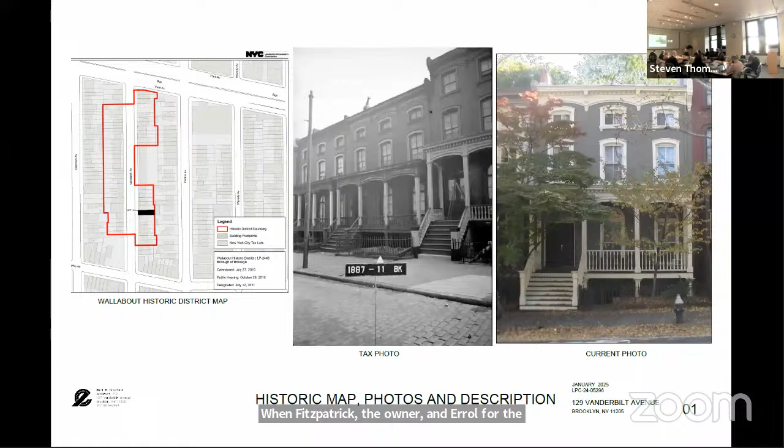So turn it over to Richard. Good morning, Commissioners. Richard Lowry, Preservation staff. I'll quickly go through the presentation with the additional details that the Commission requested at the last public hearing. Wynn Fitzpatrick, the owner, and Errol Crawford, the architect, are here should there be any questions. So again, we have a residential row house in the Wallabout Historic District.

Okay, and this is the existing rear elevation, shown to note that really only the upper floor is visible from the public thoroughfare. And here's the proposed rear addition. Just to show the current line - that's where the existing building is, this dashed line - and the extrusion on one side out to align with the neighbor here. And this is the alignment of the existing neighbor on this side, and it's just a little bump out of the wing wall and the rear addition.

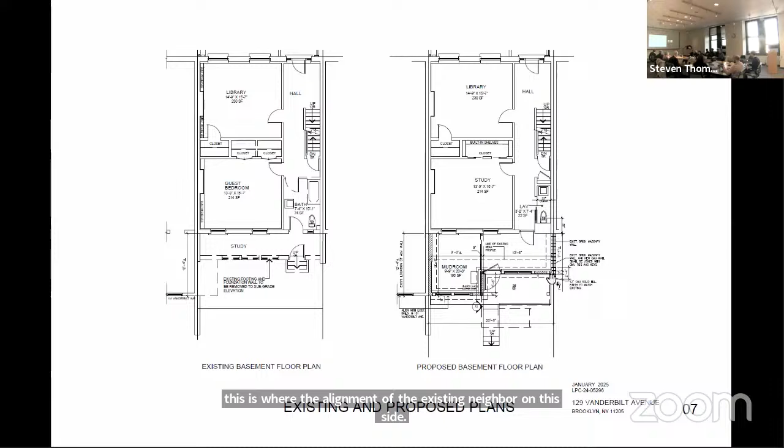And just to show the existing photos again of the rear line of the additions, and you can see the neighbor to the left here. One of the things the commission requested was a rendering just showing the proposal in relation to the adjacent buildings. And again, just a detailed section that we saw last time. But that's basically it. If there are any questions?

I have a question. Were these buildings - or maybe we don't know really. If we need to open the proceedings if we're going to ask to speak. I have a motion, Commissioner Master, to open the proceedings. A second, Commissioner Goldblum. All right, now you can go up and speak. Yeah, thanks.

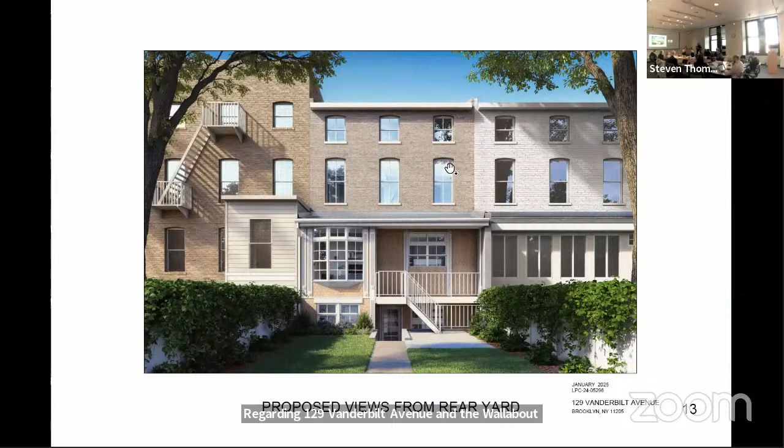Great, okay, appropriate. Then I think we can ask Commissioner Goldblum to read the motion. Regarding 129 Vanderbilt Avenue in the Wallabout Historic District, the application is to enlarge the rear yard addition. I note that this building's scale, style, materials, and details are among the features that contribute to the special architectural and historic character of the Wallabout Historic District.

Recommend approval, finding that the work will not eliminate or damage any significant architectural features. The proposed work will not be visible from a public thoroughfare. The extended rear yard addition and party wall will align with an adjacent rear addition and will be a modest increase beyond the others in the row, and the design of the rear addition, featuring wood shake siding and punched openings with multi-light windows and doors, will feature a level of articulation, materials palette, and ratio of solid to void that is consistent with other rear yard additions to row houses within the historic district, and that the proposed work will not detract from the special architectural or historic character of the building or the historic district.

Commissioner Jefferson, would you offer a second? Go second. Mark, would you call roll? Vice Chair Bland, Aye. Commissioner Chapin, Aye. Commissioner Ginsburg, Aye. Commissioner Goldblum, Aye. Commissioner Jefferson, Aye. Commissioner Master, Aye. With 6 in favor and none opposed, the motion passes.

Right, we'll move to the next item. That's public meeting item number 2, LPC 25-03381, an application for a certificate of appropriateness in the Borough of Manhattan, block 1383, lot 51, 823 Madison Avenue in the Upper East Side Historic District. This is an apartment building originally built as two houses in 1880 and altered in the neo-federal style by S. Edson Gage in 1926. The application is to alter the facade, replace storefront infill, and install awnings and signage. This was last presented at the public hearing November 26, 2024. No action was taken at that time. The applicants will present revisions to their proposal in response to your comments after we open the proceedings.

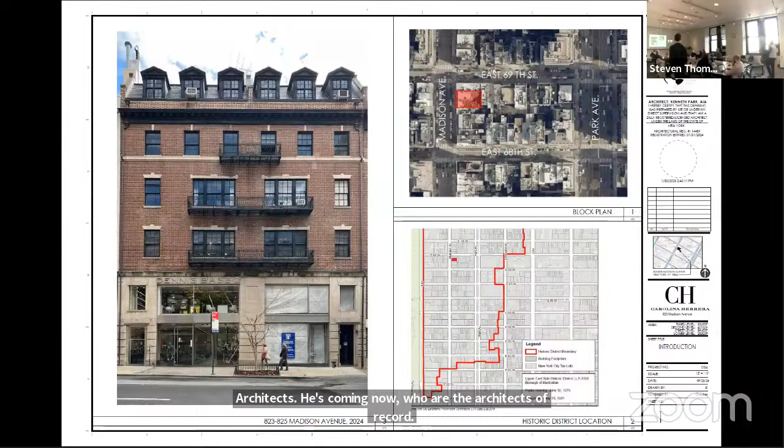As Corey mentioned, you last saw this proposal on November 26th, right before Thanksgiving break. This is a proposal for the new flagship store for CH Carolina Herrera, and they'll be occupying the three lower floors of the building, while the upper floors remain residential. As you might recall, the proposal was for the replacement of the entire base of the building. This is all non-historic fabric as a result of three or four generations of change since the 1980s. So the proposal includes replacement of the base, new storefront infill, and signage.

We can go to the previous proposal here. We have the existing condition on the top and the previous proposal on the bottom.

Just as a refresher, these buildings started their lives as a pair of row houses in 1880, designed by Lamb and Wheeler. Then in 1926, they were completely refaced in the neo-federal style by S. Edson Gage. In the existing condition, some commissioners observed at the original hearing that there's a subtle asymmetry to the design of the overall building. The building to the north was originally 4 feet wider than the building to the south. So while it has a symmetrical composition, the details are fudged a bit to create the apparent symmetry, but there are dimensional differences.

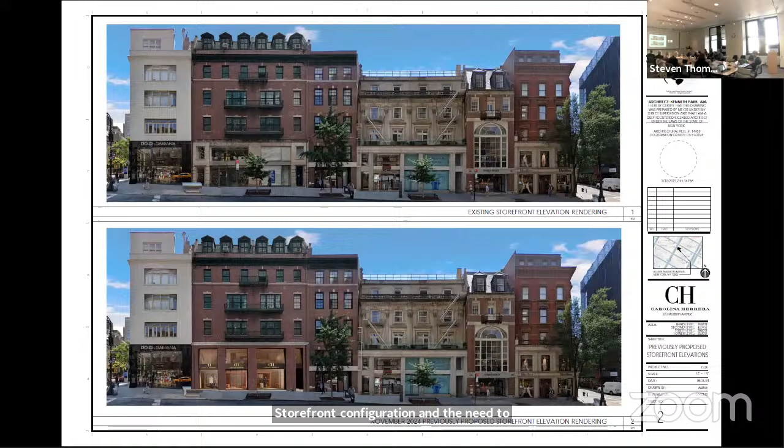At the hearing, the comments from the commissioners focused on 2 primary issues: the storefront configuration and the need for a more symmetrical composition that related better to the upper facade of the building, and the design and effect of the architectural fins at the 2nd story of the storefront. We'll look at this in detail, but for commissioners who weren't at that hearing, this is a system of metal fins that recalls the historic awnings and treatment of shading devices on the upper floor of the storefront.

You can see in the original proposal, we had 4 bays with no defined center line. Each of the piers was of a different dimension with a sort of gradient effect, and each of the bays had varying dimensions.

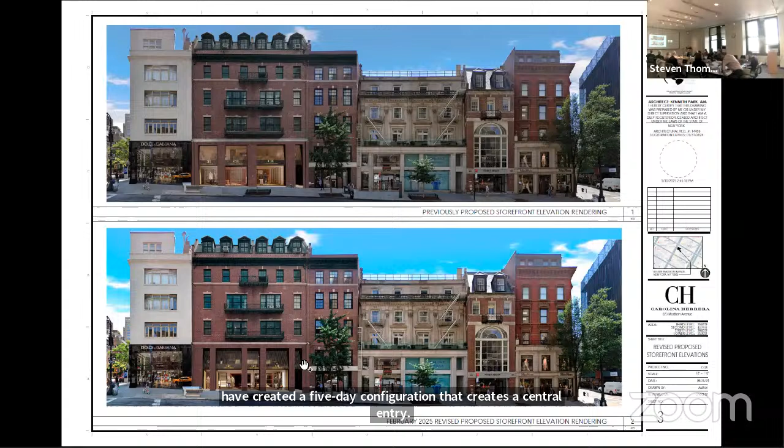Here on top is the proposal, and the current proposal is on the bottom. We've created a 5-bay configuration that creates a central entry, 2 flanking bays, and then 2 bays at the outside, one of which remains the residential entry to the upper floors. This design is based on the historic condition of the building. There was some question about brick versus limestone. The base of the building was historically brick, typical of the neo-federal style, and that kind of underscored the lack of symmetry in the original proposal, and maybe called for a stronger assertion of that symmetry.

Looking at that original condition, it was again a central entry that led to the 2 storefronts. There were display windows at either side, with the one to the north slightly larger to compensate for that dimensional difference between the 2 original 1880 buildings, and then outside narrow bays for the upper residential floors above. The piers were brick all the way down to the sidewalk, and there was a base or stone sill below the storefronts at that time.

Looking back to the context for this proposal, there's a series of approvals by the commission for brick bases on buildings along Madison Avenue, just 3 examples. I think you can see the similarities between our proposal and the previous proposals, carrying on that same sort of proportion and scale of the openings and the relationship with the upper facades. Now with the new symmetrical composition, it's very consistent with these previous approvals.

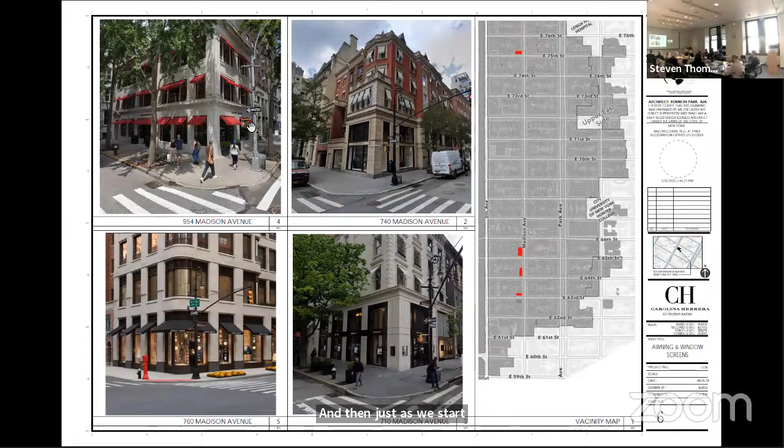As we start to talk about the architectural fins, we looked at other examples of awnings along Madison, how they create a distinct vocabulary. Historically, they were used for weather protection, and some places sold goods under the awnings. But now they are primarily a sun control device and for branding and identity. So we see that layered approach to the facades, the projecting awnings, on the ground floors and the upper floors.

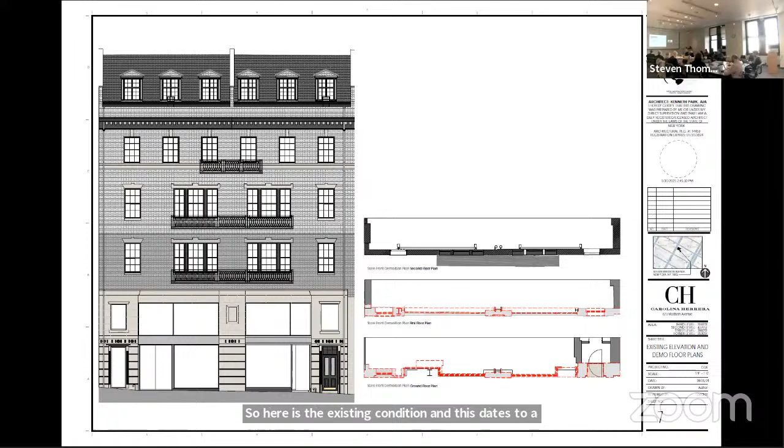Here is the existing condition, which dates to a 2013 approval designed by Paige Cowley, and the current proposal. We have that central entry, a slightly larger north bay. The piers are all very close in dimension, off by inches, just to mediate between the two existing structures. It's not just trying to create the symmetry of the building, but also adjusting for what are the bones of an 1880s building. The southernmost bay remains the entry for the residential floors, and the outside flanking bay on the north end has a very similar treatment to match the southernmost bay.

The upper floor, the second floor - this is a true two-story storefront. There is an occupied second floor within the retail space, and the spandrel is expressed dividing the two floors, and then the architectural fins extend back along the second story.

Here is a detail, the existing on top and the new proposal on the bottom. Again, looking at that storefront configuration: large glazed opening with the spandrel extending across, and then the architectural fins canting back from the face of the brick.

At the time of the hearing, commissioners were questioning the approach of the architectural fins and asked us to study the dimensions, the materiality, the depth, the width, the spacing of them. We did so, and as part of that process realized that the spacing was really important in order for the fins, the entire system, to maintain its gravitas.

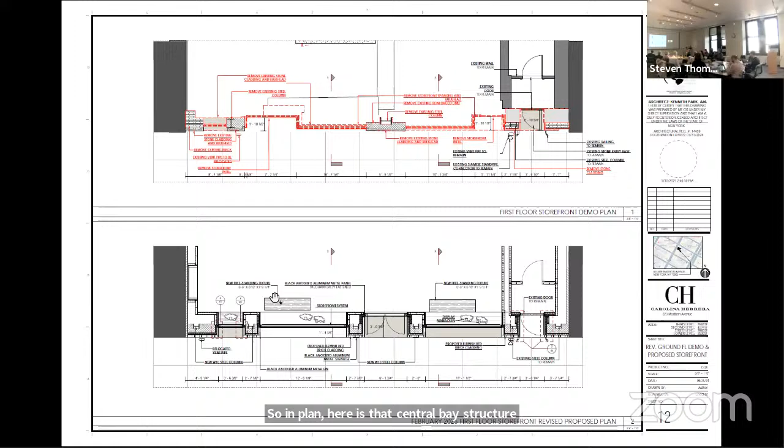So in plan, here is that central bay, putting the structure into the entry, and here was the previous proposal for a symmetrical bay, and the current proposal: a central entry and then the flanking bays.

We've also addressed the graphics a bit. There was a full-scale mock-up built of the architectural fins, and we'll take a look at it.

We tried to model as closely as possible in the renderings the effect and the intent of the fins themselves, and the effect as you're walking along the street, because it is meant to be a dynamic installation.

I was trying to think of what it reminded me of, and I kept thinking of a film reel, in the old films when you see the negative lines moving. But really, I think it's more of a zoetrope, where you're seeing something moving behind a series of openings or apertures.

So as we look at the details of the fins, there's going to be a series of mock-up installations, married with a series of renderings, to better understand how this will appear in the streetscape and what the effect will be on the overall building and the rhythm of an avenue.

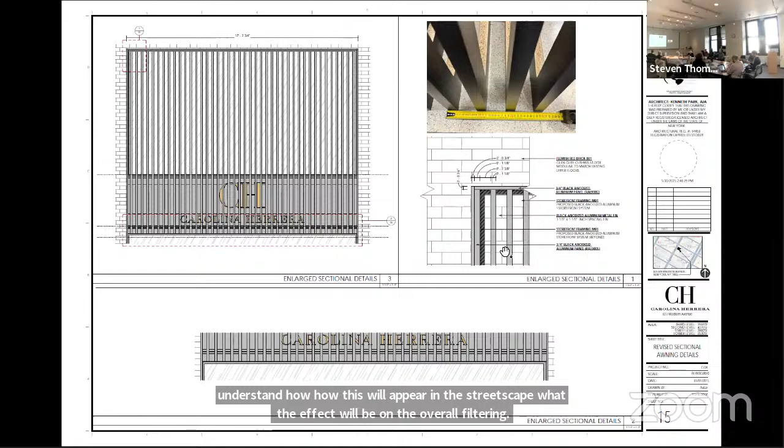So here are the proposed details: 1 and 1/8 inch fins with a 2 and 3/8 inch space between them, and they are 2 and 3/4 inches thick.

That's actually not as deep as it was originally proposed. They've been narrowed up a little, so it actually helps in the reading as you start to get onto the street. And then on top is a sample of the mock-up that was built.

Two gentlemen holding up the mock-up over your head in a nighttime installation, with interior light shining on it.

So we're looking from the south, and here the view is closed. Unfortunately, I don't think you can see this, but what you do get in this view is a reflection on the side of the fins. Very pronounced, and it creates a contrast between the front and the back.

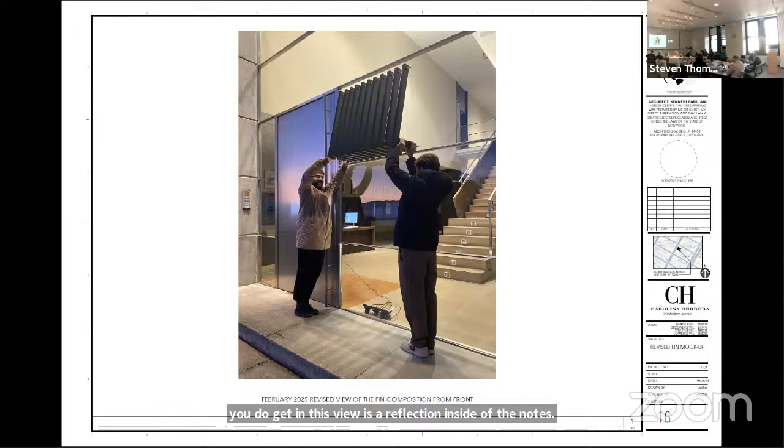So you start to get gradations in color as you're approaching from the south, now seeing the fins. This is the first view.

Moving as you move north, the view starts to open up, and you're seeing the openings between the fins on axis, where it opens up the most. Clear views through, and then as you're starting to pass by to the north and farther north.

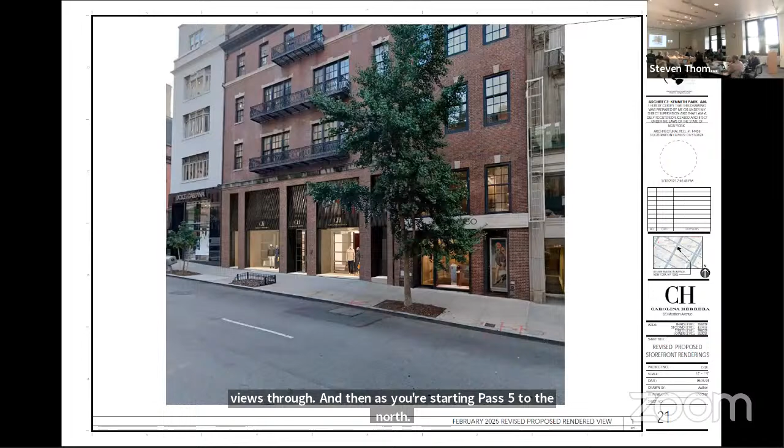And so there's a series of renderings that represent these views from the north. I would point out here that the view is closed, more closed on the second floor, in this view obliquely, but it's not dissimilar from how you experience a normal storefront because of the reflection when you have an oblique view.

You can never see directly into storefronts unless you are in that mirror location, either directly in front of the storefront or just off to the north or south. So you can see in the windows to the south, getting the reflection off of the storefronts. It's not creating a less transparent condition necessarily than what you see with a normalized view.

Detail view from the north, the light coming through. And then this is the view on the same side of the street, looking south, here's the storefront.

So all of this is contained within the system of the storefront. There's this deep reveal, the fins extend back, and the glass of the second story follows that plane of the fins themselves.

And with that, I'm happy to answer any questions.

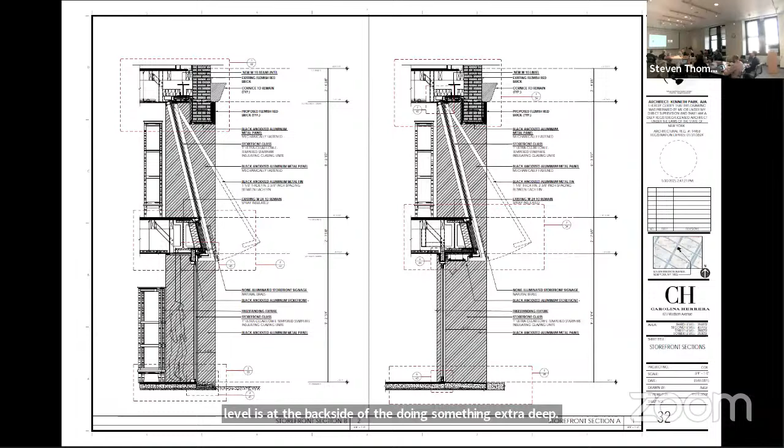So if they're operable for cleaning purposes, the fin would be this white line in front of the glazing that you're seeing here. Until you showed that, I wasn't aware that it canted back.

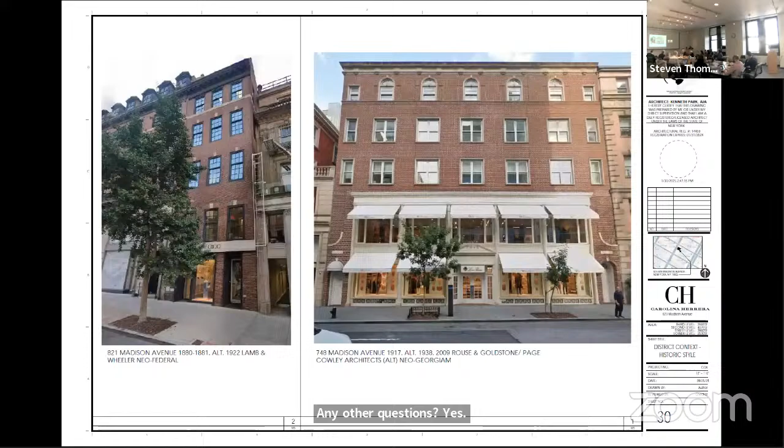Any other questions? Yes, Commissioner Jefferson. On page 8, the symmetry of the base - is it based on the historical facade, or on this existing facade? It is based, drawn from the historic, with a series of...

So the windows don't align really with the slots below, correct? They do not. And the center panel carries this center pier and extends a little bit over to the windows. Let's go back to the historic.

So it's a kind of simulated symmetry? It is. You can see in the historic condition, the outside bays are off too. Okay, so it's based on the existing. Thank you.

Any other questions? All right, I think we're ready to have some thoughts. Commissioner Ginsburg, do you want to start? Okay, so I think the revisions to the elevation in terms of the spacing is fine and is much closer to what was there historically.

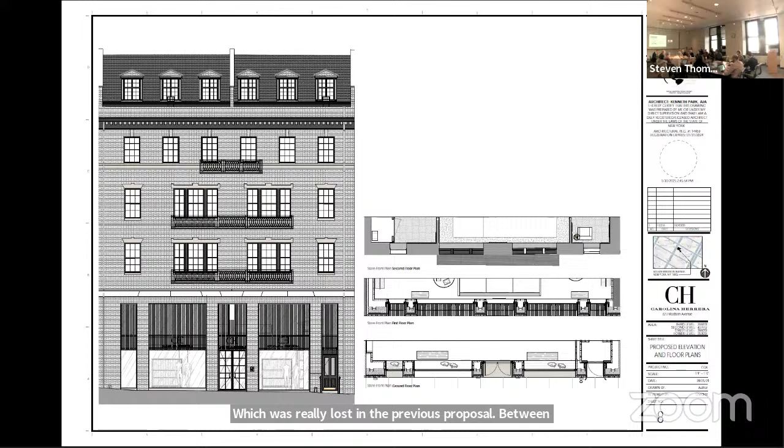When it was first presented, I felt that this building throughout its history had maintained a rough asymmetry, which was really lost in the previous proposal, particularly in the lower floors. So I think these changes have established a much better relationship with the upper floors of the building, both the use of the brick and establishing a similar pattern of slight asymmetry, which comports very well with its history. I think the louvered awnings are successful, so I can approve this as presented.

I actually think the applicant did a great job in responding to our comments. They made the storefront more symmetrical and it relates better to the upper floors. I think the reason we had asked for that is because they changed the material from limestone to brick.

So it made more sense to have that more symmetrical relationship. I think we had also asked for more details on the fins, the louvered elements, and I think they did an excellent job showing us how it's fairly transparent, especially when you look straight on. So I can find this appropriate.

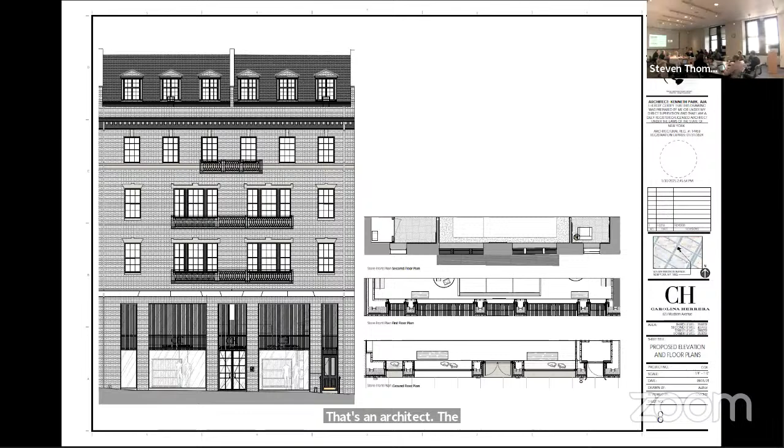I find the tension between symmetries of base, middle, and top a nice tension as an architect. I can approve the base. Replace storefront infill, I can approve that, appropriate. The awning I find marvelous, because of the way the light would come into that, the grading of the light, the feeling of the light penetrating - that would be quite beautiful. So I'm for the metal.

Yeah, I agree. I think the design's improved significantly. The spacing of the piers feels just a lot more comfortable and natural with the building above.

And I think the interesting thing about the angled blade design is that, through the rendering and the other modifications to the details, it's become a lot more similar to the balconies above. I think the balconies above are a significant aspect of the building's design, and the density of the angled fins starts to replicate that, or recall it. So I think they could work with staff to try to strengthen that relationship by looking at the dimension and materiality of those angled fins.

I think it just looks less like air conditioning louvers, which was my concern last time, and I think it has to do with the spacing. So I think it's all good, and see what happens.

Good, thanks. I didn't see it the first time around, but I think certainly the design is improved, looking at what was shown in November versus now. And I'm particularly admiring of the fin idea as a kind of remembering - vague as it might be, but still remembering - of awnings. Commissioner Jefferson said they're marvelous, and I wouldn't disagree. I think it's quite good.

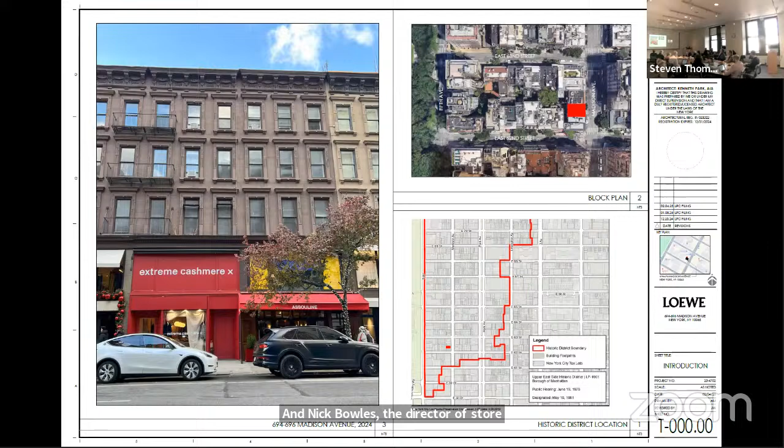Proceedings are open. Good morning, Commissioners. Aaron Ruley, Higgins Quasebarth & Partners, preservation consultants for this project. I'm joined today by Antonio Rodriguez of Kenneth Park Architects, architects of record, and Nick Bowles, director of store planning for Loewe. We're back today with revisions to the proposed design, which was originally presented on January 14th. This is the proposal for the conversion of 2 buildings, 694 and 696, for commercial use as the North American flagship for the Spanish fashion house Loewe, with proposals for storefront replacement, new signage, removal of the party wall, and rear yard extensions.

At the public hearing, the original proposal included awnings at the storefront, awnings at all the upper floors with branding on each of the skirts, and at the rear, a full-height rear yard extension extending across all of 694 and a portion of 696, and then a 4-story extension at the north end of the building opening up to the donut, the yards beyond.

At that time, the commissioners had two primary concerns. One was the awnings—the angle and exposure of the second floor storefront awning, and the branding on all of the awning skirts on the upper floors. And at the rear, commissioners asked for refinements to the design that might speak to the individuality of the buildings historically and represent in some way their layered history.

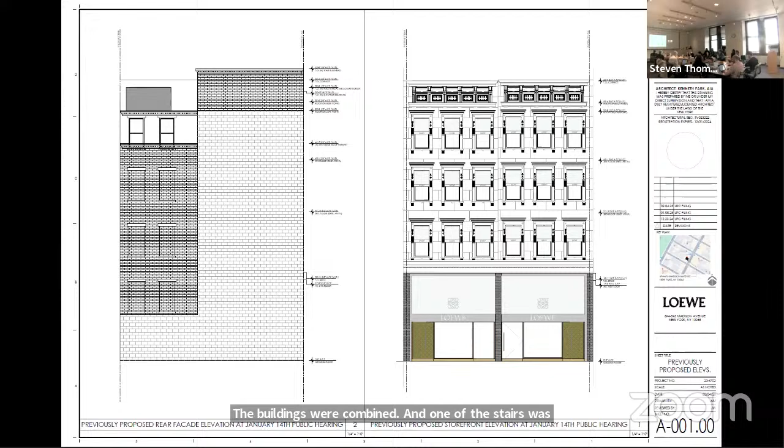Since 1912, the two buildings have functioned as a single building. Today we're looking at the revised proposal that includes increasing the angle of the awning so that more of the second floor is exposed, becoming more consistent with the Madison Avenue context of awnings on our block and surrounding blocks.

On the upper floors, there's a reduction in the branding on the skirt, with a composed design that represents the retail use beyond. In this project, the retail floors include the new single floor on the first and second floors, plus the third and fourth floor, so that's all customer-facing space.

This is a scaled back version that gives you a hint that there is public space within those floors. The upper floor is just plain white awnings, typical for upper floors of residential buildings. At the rear, there are a series of changes we've made, including scaling back the footprint. The rear of the third floor is the full width of 696. It's a little tricky because it unfortunately cuts through the adjacent building, off 694's end, so we'll look at all of these as we go.

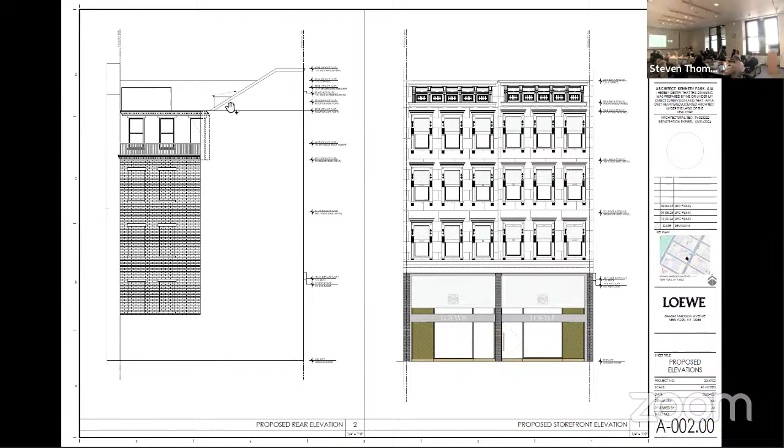I think we're going to switch to the deployed awning so you can get a sense of what this change really looks like. Increasing that angle gives a clear view of the second floor from across the street, but also much more openness as you're walking along the east or west side of the street. It won't be deployed all of the time, and there's a very important design feature within the interior of the space, so the intent is for that all to be apparent and not obscured.

As I mentioned, on the upper floor we have the design pattern at the outside bays, the logo, the Loewe name, at just the outside bays of the building floor. At the center bays is the anagram, which you can see larger on the storefront awning, giving a sense of continuity that connects both sections of the building and the floor itself, which is surprisingly close to the neo-Grec detailing we see on the windows around.

In elevation, here is the existing condition and previous proposal, and then the previous proposal juxtaposed with the current proposal. You can see the upper floors are much more quiet and consistent with the overall design, which achieves a high level of craftsmanship in the storefront and the overall approach to the design. We think the changes to the awnings have really brought that into alignment.

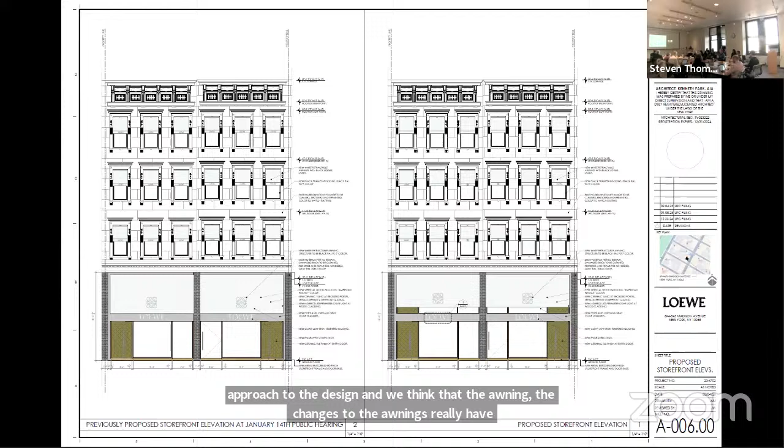The projection of the awning will now project five feet, and it is adjustable, so that can be modified.

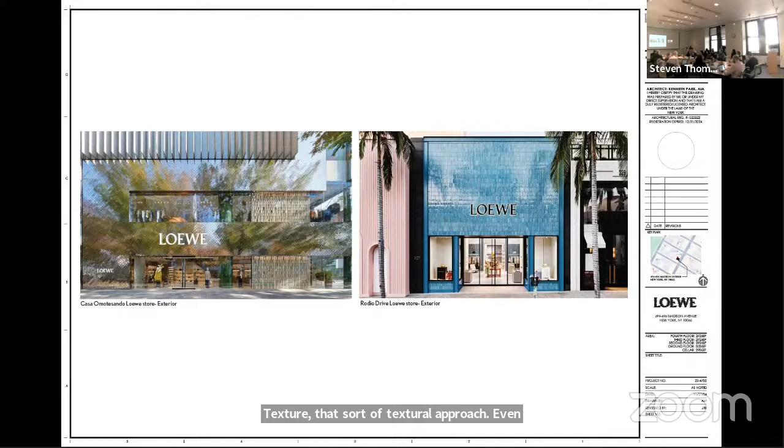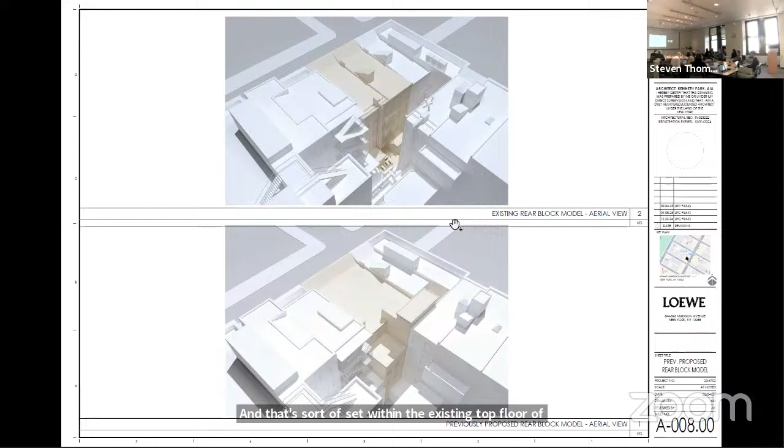One floor down was a 4-story extension at number 696. That set within the existing top floor of the historic building, maintaining 2 window bays of that building. In the current proposal, the full height rear yard extension has been set back only to the party wall line.

So behind 694, maintaining the full width of 696, the top floor, the 3 windows, cornice line, and then that cornice line wraps around on the north face of the rear extension at 694. Above that, navigating the stair bulkhead and elevator bulkhead with forms that are more traditional in approach—a sloped bulkhead roof and a typical elevator overrun—so that it breaks down the massing and the scale of the rear yard extension.

At the 5th floor, we're fenestrating that north wall so it comes all the way around to the window openings. A sill is dropped on the rear of 696 to create access for this terrace back here, which will be usable. We'll look at this in better views, but the parapet has also been dropped with a railing to create a more active space and help with the scale and proportion of the openings back there.

So a series of changes that really address the original history of the two buildings—where it is not visible from any location, and where it is blocked by the adjacent building, being able to develop to the full height of the building at 694, then expressing what's needed on the roof in a more traditional vocabulary.

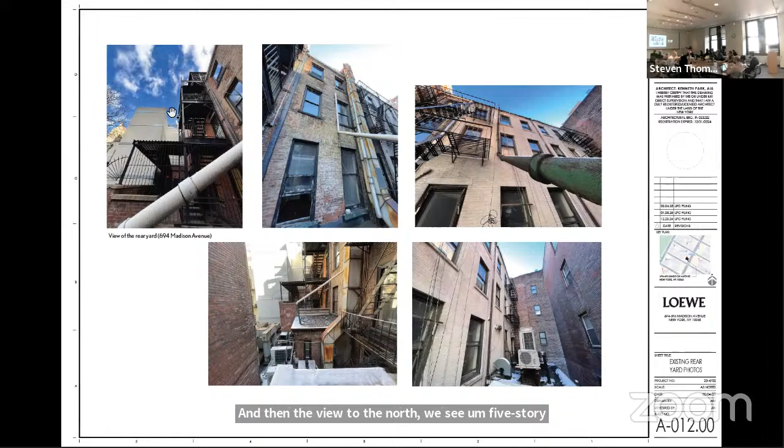A little bit of the block context: again, this entire row was historically a continuous row of row houses. You can see that the north end of the block has been dramatically changed by the construction of earlier buildings, but most recently the project that is now Hermes on the corner. What remains of the row here shows lots of changes as a result of the commercial conversion of the buildings. So when the buildings went from residential with very small rear yards, you start to see expansion at the rear, exterior stairs, and all the mechanical equipment needed for the restaurant.

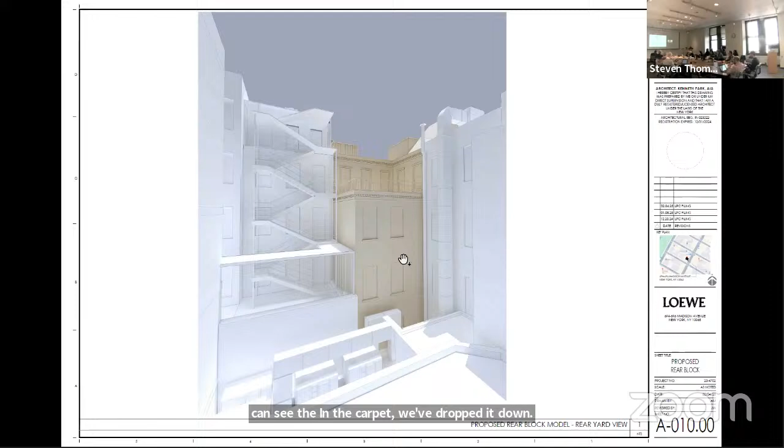The four-story extension has two bays of windows. The third bay would have been partially blocked by the perpendicular building, so we've foregone the third bay so as to not have a half-represented blind window. These are blind windows, and they're on the lot line.

Given the program at the interior, it was a design decision to keep those as blind windows rather than glazed. This is also the approach used in the approval for 700 Madison, which is a sister building two buildings to the north, and it also has lot line windows that are blind and detailed the same way.

In elevation, I would also note that the south wall, which we don't have an elevation for but faces 62nd Street, would be all brick as well.

Just a reminder about this context of changes. These are all similar projects where a row of row houses, a portion of which have been expanded the full depth at the rear. As you can see, these are largely core changes as well, stair and elevators that pop up behind the buildings, but all very consistent with what's being proposed today.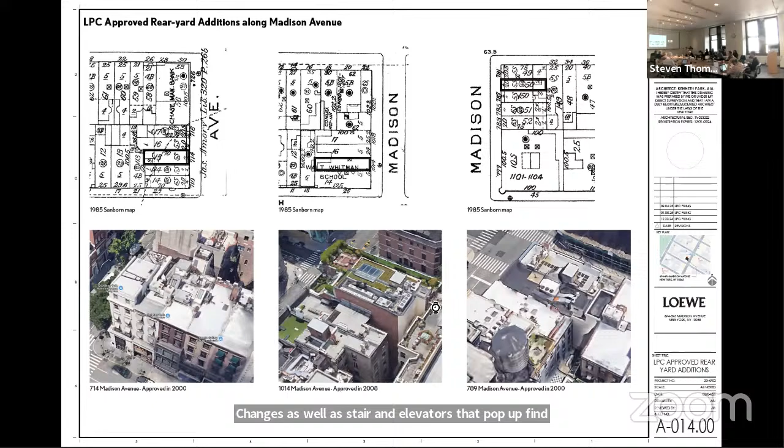And with that, I'm happy to answer any questions. Questions, commissioners? Yes, commissioner, we'll come back.

For the blind windows, what is that space being used? All back of house space.

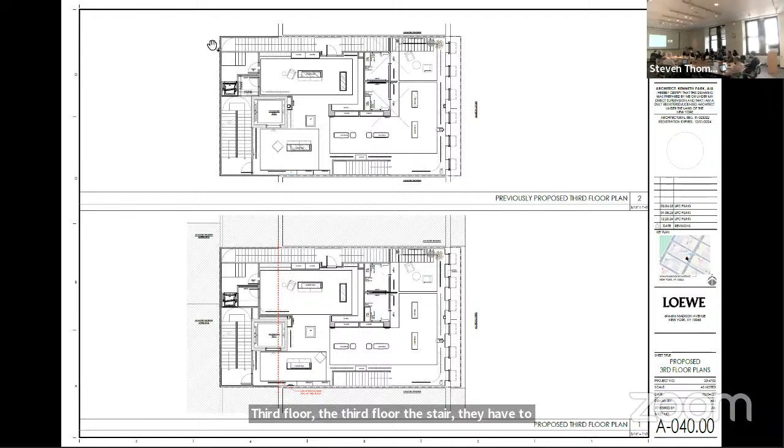You can see, oh, this is cellar for the upper floors. Third floor, the stair, they have to have two stairs running through the building, and so there's one stair coming up through the back, and that is the blind opening on the third floor. And then on the fourth floor, it's continuing up there as well. And then this, I think, is just utility space between the two stairs.

Got it. Commissioner Goldblum: I just wanted to run through those floor plans again. Were there any changes to the floor plans? Last time I was concerned with the extent of the removal of the center wall.

Here's the ground floor and second floor plan. At the ground floor, there's that seven-foot extension that's being retained, with the new column. The floor plan has not changed, aside from the changes needed for compressing the stair and elevator into the footprint of the singular building; the party wall commitment is not changed.

Questions? No, okay. Vice Chair Bland, I thought maybe I'd just note, mostly for your benefit, I don't think you were here. I was done. Yeah, but I think the rest of the commissioners here were.

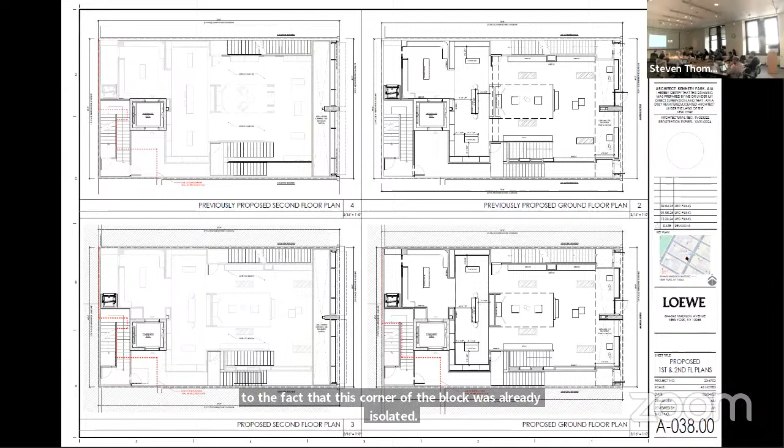There was a pretty thorough discussion about the work at the rear facade, because it's somewhat unusual for the commission to approve removal of an entire rear facade on the bottom of one building, let alone two. But I think, other than Commissioner Goldblum, there was broad support in this particular case from the comments we heard, due to the fact that this corner of the block was already isolated and sort of closed off, and that there were many other large additions within the donut in this particular block and along the avenue here. But the commissioners did ask for the design to be looked at more closely at the back, even if it wasn't something visible from a public thoroughfare.

And it's completely not visible from public way. Correct. Yeah, okay, thank you. And for reminding me I wasn't here.

Bad me. Okay, I think we're ready for some comments. Commissioner Lutfi, do you want to start?

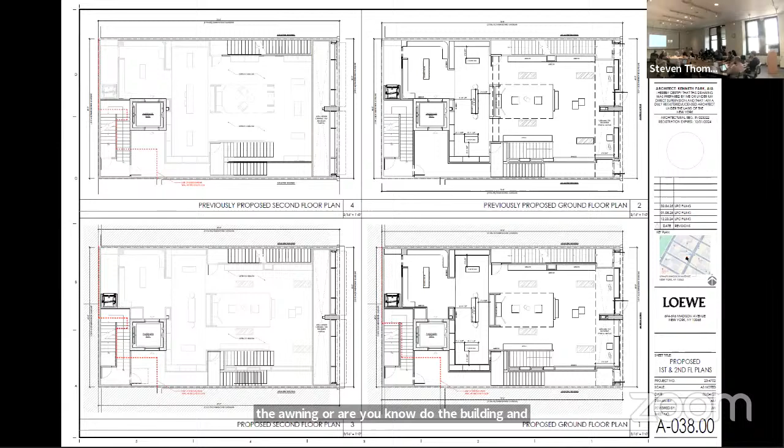In the front, I think the changes to the angle of the awning do the building and the applicant themselves a much better service because it lets in and opens up the glass at the bottom, and it also allows more light into the building, into the commercial space. Then I think the changes to the awnings above are good too.

They also work well, they're much more understated. On the rear, again, I was very open to the work that was going on for the reason stated, which was this whole area is very closed off and isolated. It's not visible. That said, I have to applaud you because I think the changes dropping the parapet and blending it in more with the rear just works well, works better visually, and I think it's a much stronger project. Thank you.

Commissioner Master: I think that I was largely supportive of this the first time around, but I agree with Commissioner Lutfi that this application is much improved. I think that the awnings in the front, having them angled and increasing the visibility into the store, is very helpful. And I believe that the awning, in terms of its scale and design, is much more similar to other awnings on Madison Avenue.

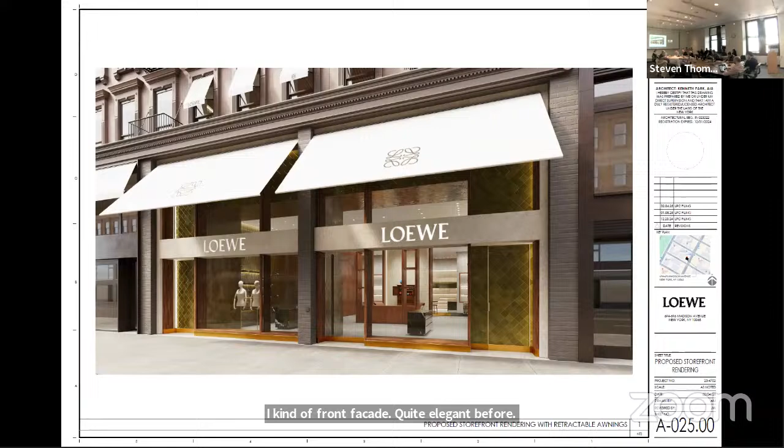I find the front facade quite elegant. It was elegant before. Now it's even more so, the logo being shifted from one window to another. The front facade is very elegant. Rear yard addition works well. Removal of party wall, appropriate. Everything is fine.

I think that the signage and canopy improvements at the front are significant, but I still can't support this, and it has to do completely with the notion of the eradication of the identification of the buildings as two separate buildings. I feel that the removal of significant quantities of the interior party wall on all floors is gratuitous and is significant in terms of the structural identity of the buildings being separate.

And I think that the things they did at the backyard are significant improvements, but I still feel that the full height rear addition to the southern building is one we don't support, because it eradicates the reading of the initial volume of the building, irrespective of its visibility from the street. So for those two reasons, I cannot support it.

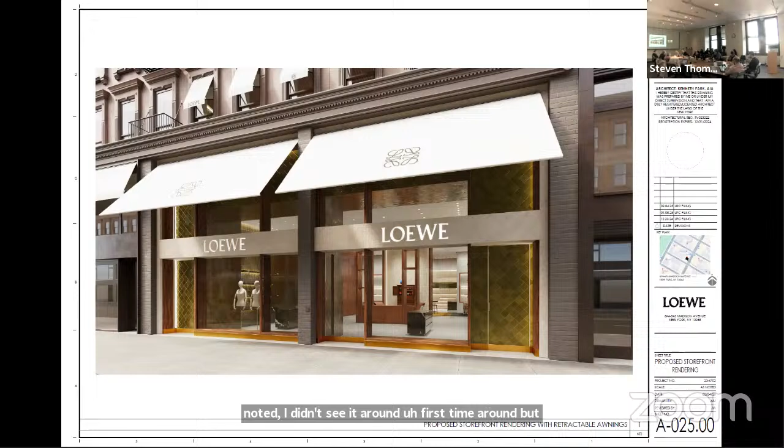As was noted, I didn't see it around the first time, but I think the facade has been slightly changed and for the better. I do question how long those elegant white awnings will be white, but that's your problem. Down the road, maybe it will be gray very soon. I think the back is probably the controversial piece of this, the loss of the original brick.

In this case, I can support it, given the exact configuration of that rear facade, the lack of any visibility from the public way, and the fact that there's so much other stuff happening right back there. I think for me, the public is not losing anything by losing that wall. So I can support it as well, and I think that means we have enough to support it. Where do we start? Oh, Commissioner Lutfi, yes, would you read it?

I think it's going to be a great addition. Thanks for showing your other stores as well. It was interesting to see the brand and how it expresses itself physically.

In the matter of docket 25-05644, 694-696 Madison Avenue, Upper East Side Historic District, two neo-Grec style residences designed by J.H. Valentine and built in 1878-79. The application is to construct a rear addition, remove the party wall, replace storefront infill, install interior partitions, and install awnings and illuminated signage. I note that the building style, scale, materials, and details are among the features that contribute to the special architectural and historic character of the Upper East Side Historic District.

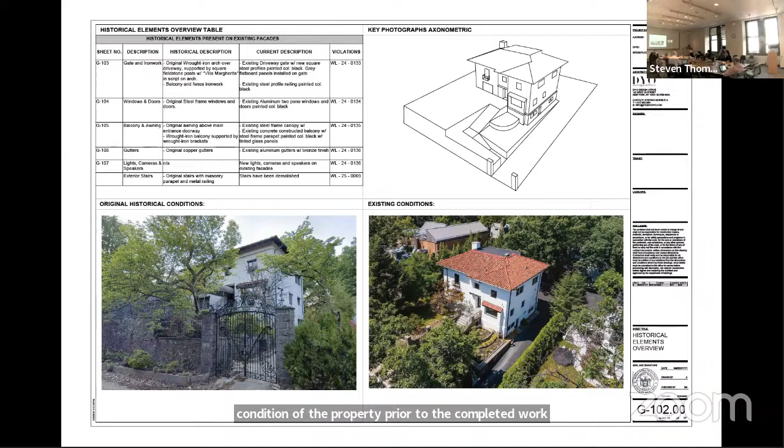Here you can see the gate at the driveway as it existed at the time of designation on the left, and then the gate installed without permits on the right. In addition, the ironwork of the walls.

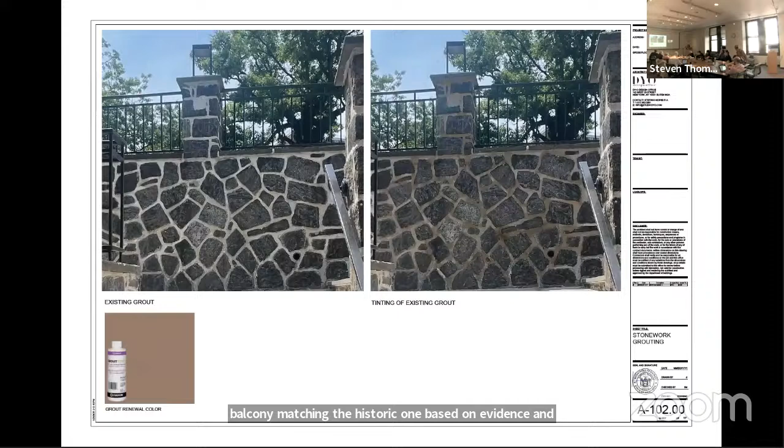The architect is also proposing to tint the mortar at the walls to better match the historic appearance of the mortar before it was repointed.

In terms of fixtures at the front facade, the projecting cameras will be removed and new ones that comply with the commission's rules will be installed. The black finished light fixtures at the second floor adjacent to the door at the balcony will be replaced with white finished fixtures, and the light at the second floor on the upper right will be removed.

The proposal is to retain the existing speakers at the first floor, located here and here. In addition, the applicant is proposing to install custom applied muntins adhered to the exterior of the first and second floor doors that do not currently have a multi-light configuration, and at the picture window. These would match the details on the exterior of the muntins throughout the facades on the other windows that were replaced. Now I believe we have the architect here on Zoom, joining us remotely to explain the proposal and answer any questions.

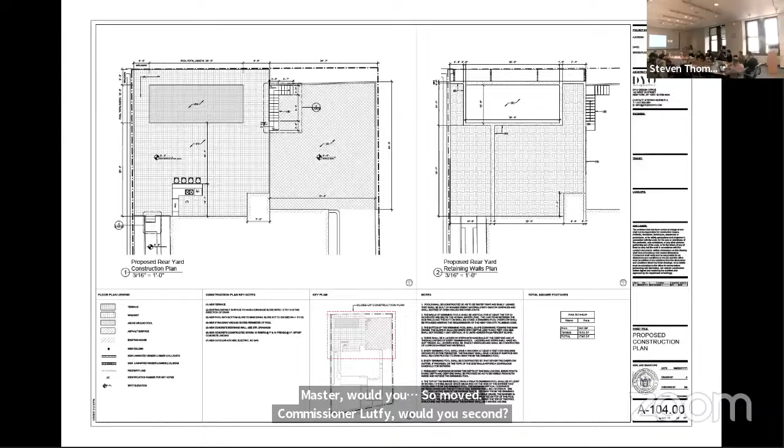Yes, hi, can you hear me? Yes, just state your name for the record. My name is Stefano Morisi of DYO Design Office. I apologize I couldn't attend in person, but I think Michelle explained all the other elements of the main facade that we wanted to modify and address all the items that were brought up in the last meeting.

Mainly, I think with the design of the gate and the balcony, we will go through shop drawings from the fabricator, to be approved by landmarks. And we will try to propose an image more similar to the existing ironwork.

For the back area, as we noticed in the other images that Michelle showed, the back original staircase that we see on the plan on the right before the driveway was removed. At the moment, they started work also for the pool itself, and with concrete work for the support of the new terrace in the back.

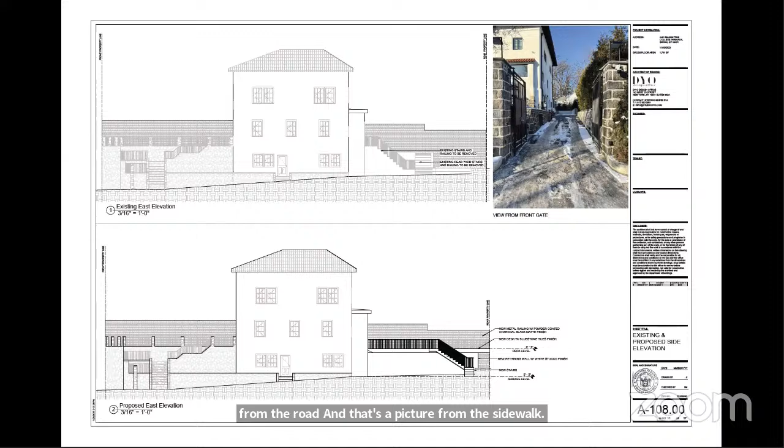All this is not visible from the road, and that's a picture from the sidewalk. So everything is behind the house and not visible at all. Apart from this, all the stone work and cement work will be stuccoed like the house, and all the ironwork will be painted black like the existing windows. On the pool area, we will install stone pavements in blue stone, but all this is not visible from the front.

Michelle, if you could go back to the main facade, I just want to explain the changes. For the cameras, before we had 360 cameras, security cameras on the facade. We decided to propose a much smaller, 1-inch thick camera that would go under the elements of the entry and the balcony, so these will not be visible from the facade.

The other items we were changing are the lights. The lights will be white, much smaller than the existing, about half the size of the existing ones that were black. Also, there will be a light under the removed awning in the front. The light will be right under the window, that part that comes out in front of the entry, covering the entry.

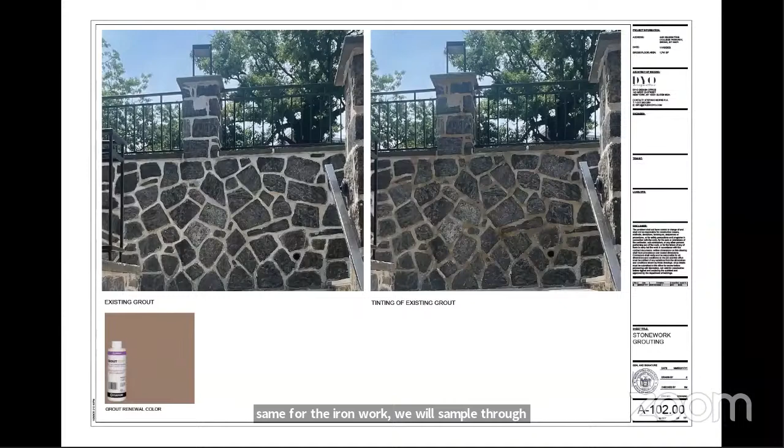And the rest is for the tinting of the grout that was in the previous slide, A102. We just wanted to more closely mimic the stone, going closer to a tint that is closer to the stone, a grayish brown tint, which I imagine we would sample with photos. The same for the ironwork, we will sample through shop drawings made by the vendor. Yeah, that's it.

Okay, Commissioner, questions? Commissioner Ginsburg: thank you. So the windows, you're basically gluing muntins on the outside, but not replacing them with true divided lights or something that looks like that, is that correct? Yes, because it's insulated glass, so we would prefer to do that. With insulated glass, right.

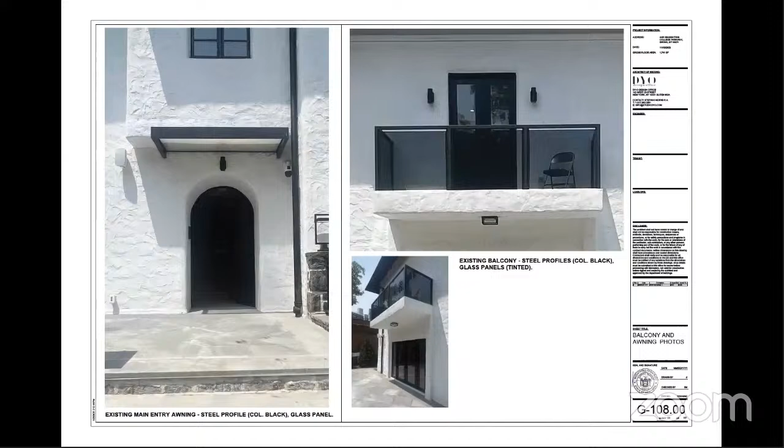The wood timbering and brackets at the entrance are covered. Those will not be uncovered in what you're proposing? Oh, so we didn't do a probe. We would like to probe that. We would need to probe and see the existing. I think the existing is still there, so we could open that and... We didn't have a chance to probe.

Mr. Jefferson, oh, I thought you had a question. Yeah, I do, go ahead. The gate, the front gate - are you replicating the existing that we see, or are you doing another gate? You're not replicating the existing gate.

So, to Michelle, we have presented a gate that was similar to the existing, had the subdivisions, the bottom part, the top, how it was divided. But then we decided, she suggested to go more similar to the existing, what is there now, without the lettering, the big N in the front.

The issue I have is, you mean the historic one, not what's there now, right? The issue I have is that the existing gate, the original gate, had cast elements in it, and what you're doing is just kind of using linear elements to make the decoration. The beauty of the original gate was these cast elements, the weight of it. It was a beautiful gate, and I don't think you're going to be able to get that feeling without cast elements.

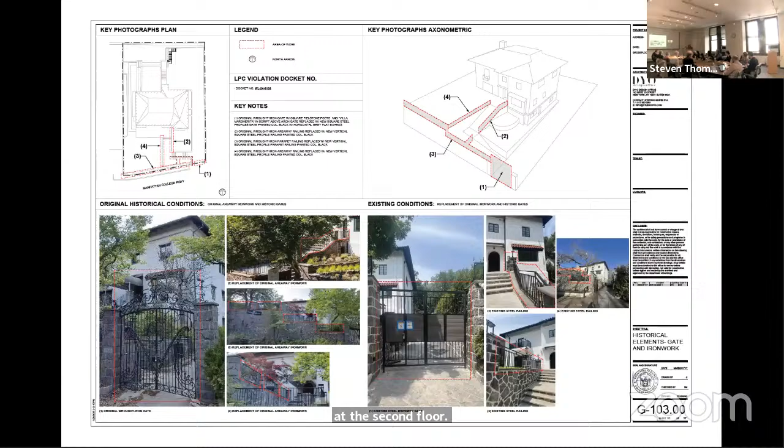There, okay. Thank you. Those are being replaced - yeah, they're all being replaced. Those would be replaced with smaller white finished fixtures. Okay, thank you. Commissioner Chapin?

The front entrance, the awning - is the awning staying like that, or is it... No, they're proposing to remove the awning completely, without replacement. Okay, I just wanted to clarify that.

And the balcony, what's the detail on the new balcony? Do you have something? So it would be on A101. While they're finding the right slide, the intent with that balcony is to remove the one that's there and replace it with a new metal balcony that matches the historic feature that was removed. So they could work with staff on that. Okay, great, thank you.

Commissioner Ginsburg: I remember when this was first presented, the owner was not present and we had no explanation of why all of this work was done without review with the commission. Do we have any explanation now?

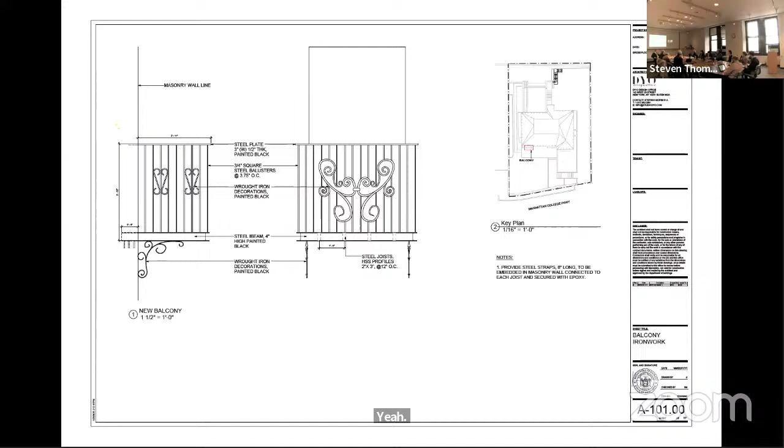But now I'm hearing it was the previous owner who perpetrated a lot of these changes. Some of the changes were a question by the community board. When we had the meeting with the community board, they asked for a letter explaining what was done by the present owner and what was done by the previous owner. Most of these items were done by the previous owner, and he signed a letter that was sent to them.

Yeah. All right. Well, what happened happened. So I have a couple of other questions. One is to Corey, I guess. Do we have any history of gluing on muntins to double pane glass?

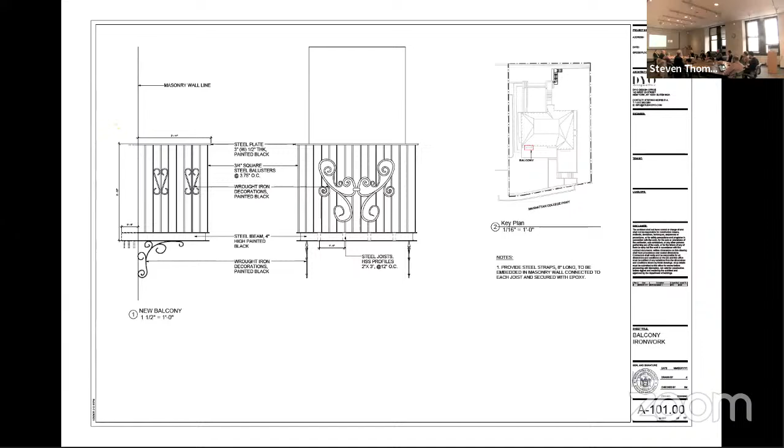Yeah, I was actually going to address that, so thanks for asking that question. The commission has at times approved modifications to windows which were not originally built with muntins, to allow them to be retrofit with this type of attachment. Generally this involves working with staff to make sure it's as permanent as it can be, considering it is an aftermarket change to the window unit. But I think what the commission often considers is, in addition to trying not to waste something new that was just built and installed, is this something you would perceive from the street? Certain buildings are situated better than others for that. They're further away, up on a hill, perhaps like this one, where the distance makes it much harder to tell this was done after the fact, and also harder to tell it doesn't have the spacers between the glass versus something right on the street. So that's generally what's considered, and at times the commission has approved such a request.

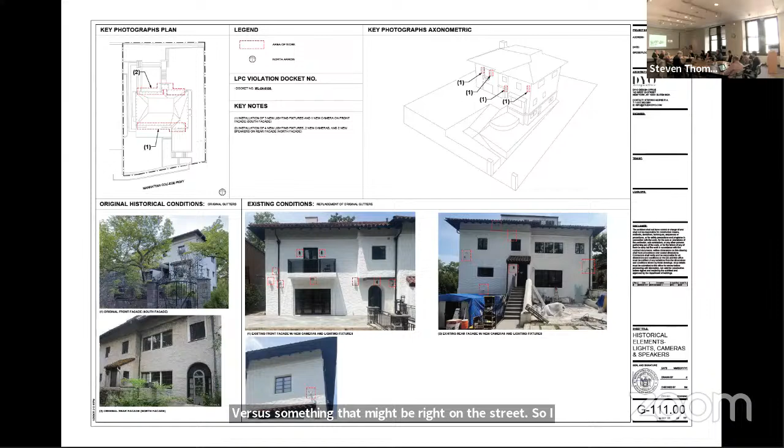Okay, and furthermore, my own thoughts on this are that if there's ever a time when staff is going to be needed to oversee very closely every bit of this change, I think this application is proof of that need.

Where did I start? Did I start with you? Oh, we're just asking questions. Sorry, exactly. All right, so yeah, we're sort of morphing into now our official opinions. You want to start, Commissioner Ginsberg? Okay, so...

As I think we said last time, this is unfortunate. A lot of the issues have been addressed. I think things can be worked with staff, and they need to be worked closely. I'm not totally convinced on the gate and balcony details, but if worked with staff to make sure we're matching the original, I think the wood timber and brackets above the entrance that were covered and removed should be added back in, or if probes find them still there, that would be better. I'll be interested what the others say about the muntins. I guess since they're non-visible, I can live with it.

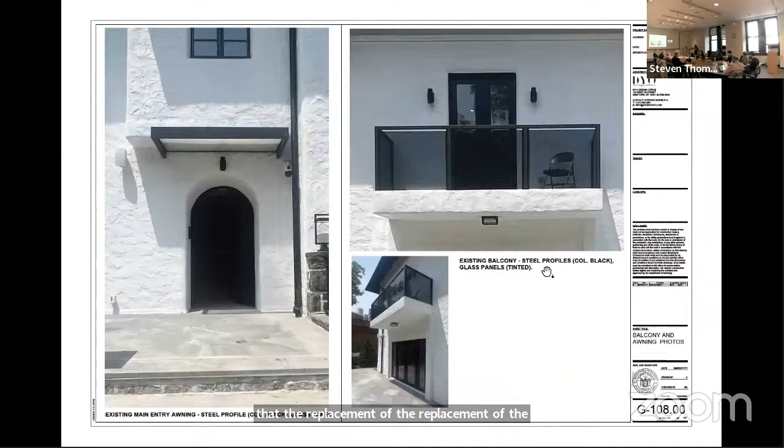I think that I made a suggestion about the grout simply because the walls seem to be really calling a lot of attention to itself because of the stone appearance. I don't know if that's the right solution, but just sort of quieting it down was the aim, and making it look more like the original wall. I think that the replacement of the gate and the balcony are great, and work with the staff on that to get the details right.

It seems that there is still some excessive light fixtures in this. I think maybe the ones on the piers just don't seem appropriate, and that they should be removed. But, and I think that's it. I think, with working with the staff on a lot of the details, I think I can approve this presentation at this point.

Thank you. Commissioner Lutfy?

So I think actually this is a little confusing, and it might be the presentation. It might be because there are changes that are happening in real time, so we're not seeing all of them, which makes it a little more difficult for us. But of course, we're working to move this forward in a positive way.

So I agree with my fellow commissioners that some of these changes are very positive changes, particularly the change to the gate, restoring it, and also the balcony. We're not seeing that because it's happening in real time. So it is very important, as Mark and Diana have said, that the applicant work closely with the staff on the details. Same with small issues like the grout.

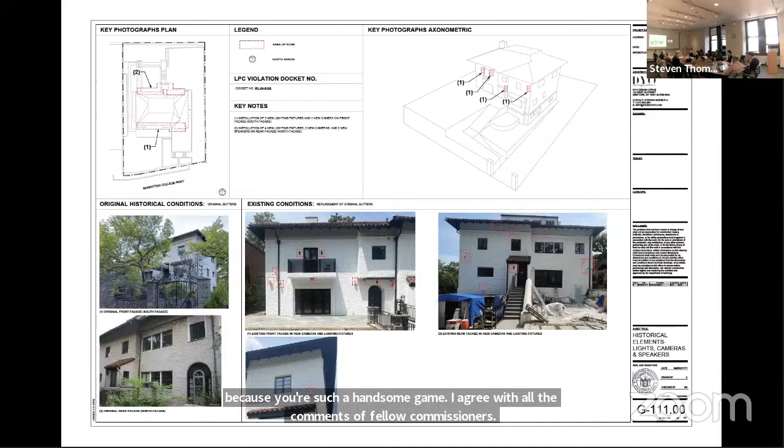How about the wood timbering and bracket? Bring it back. Yeah, okay. That's everybody but me.

Yeah, I think this is a really sad example of what can happen when people don't come to Landmarks Commission and just start working. This wonderful house has been robbed of its history in many ways, and the details, even those that we're going to probably approve and bring back, are still not going to have the patina, the history, the original workmanship that was lost. So I think it's kind of sad all around.

I wonder where the gate is, by the way. Maybe it's available still on eBay. In any event, I can approve it as well, echoing my fellow commissioners who've just spoken. But again, I'll just reemphasize how important it will be that staff is sitting right on top of every little thing here, because anything could go wrong and not bring back what we're thinking we're bringing back.

I think the gate, I understood it to be wrought iron. And if it is, that's a huge step. It's not hollow metal, it's not steel, it's wrought iron, which is the way the original gate was made. So these things are crucially important.

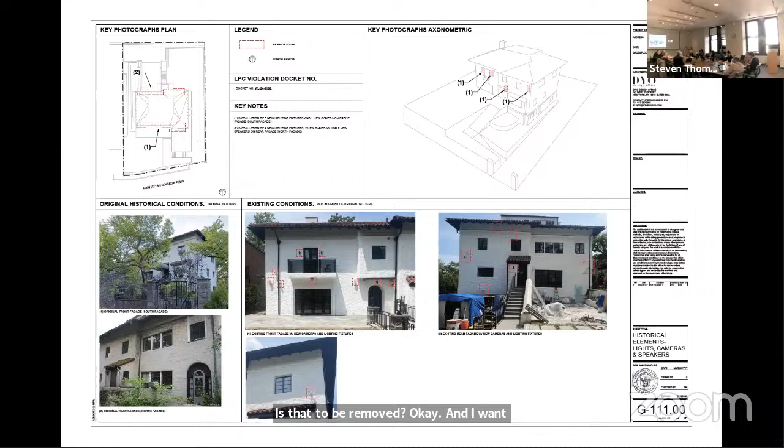So I think I started with Commissioner Ginsberg. So if you can read the motion, sir. Quick question, the lights on the piers, we had one comment on that. Is that something to be removed? Okay, yeah. And I want to emphasize also the bracket, the wood bracket, should come back. With regard to LPC...

23-04449, 4401 Manhattan College Parkway, Fieldston Historic District, a Mediterranean revival style house designed by Dwight James Baum and built in 1930-31. Application is to legalize the removal of staircase, construction of above-ground pool and deck, replacement of areaway ironwork and historic gates, window, door, and gutters, and the installation of balconies, awnings, lighting, camera, and speakers without landmark preservation permits. I note that the building style, scale, material, and details are among the features that contribute to the special architectural and historic character of the Fieldston district.

I recommend approval with modifications, finding that the staircase that was removed and pool deck to be completed are not visible from any public thoroughfare. That the materiality of the pool deck, featuring white finished stucco cladding and black finished metal railing, will be harmonious with the existing building. That the railing at the stone wall that was removed were typically early 20th century ironwork and were not a unique or significant feature of the site.

That the black finished metal railings are simple and designed in keeping with modern metal work found at buildings of this type and style and age.

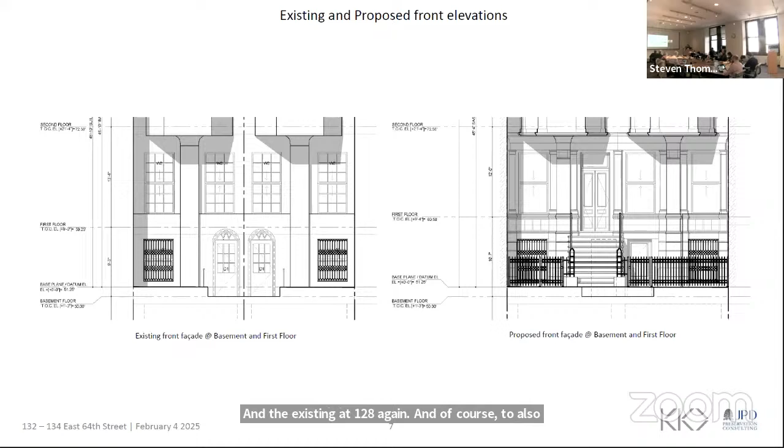Here are the proposed front elevations in context with the neighbors. So again, the Edward Durell Stone House and heading west, that's in the district. The apartment building you see next door is not in the district.

So here are proposed stoop elevations, just to show you the details of that, with of course under-stoop entrance gate. Here in plan, we're showing you the existing areaway in relationship to the existing areaway at 128, where there's still that original stoop left. On the right, we're showing you the proposed plan, showing how the new stoop would align with the existing stoop that's in front of 128.

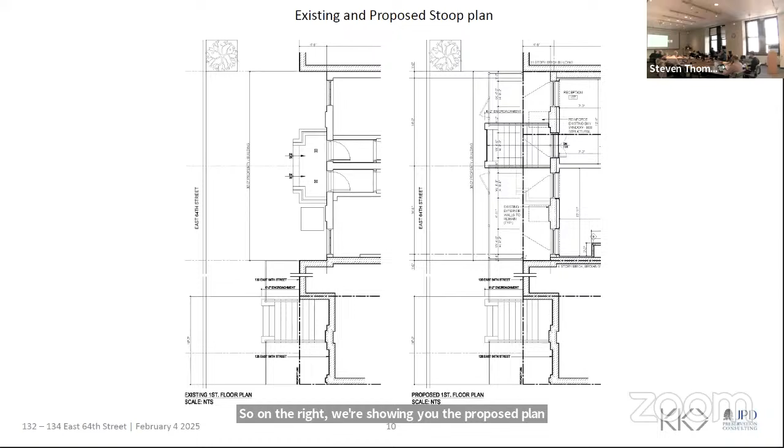Regarding facade color, we're showing you again the historic photo, current condition photo, which, based on how many layers of paint are on these buildings, I would say it's been painted a cream color for if not 100 years, close to it. And on the right you see the rendering of the proposed color.

For context, here's the south side of the block, showing you what the houses and their areaways, their railings look like throughout the rest of the block as we head west toward Park Avenue. Again, a little bit closer to Park Avenue, where we end at the last row houses that are on this side of the street.

And for additional context, this is what the street looks like across the street. This is the north side of the block, so looking directly across the street from these houses. And you'll see on both sides of the street there is really a plethora of either limestone-faced or limestone-painted houses.

Just to highlight some houses with actual limestone facades on this block: there's two here with new limestone facades, approved by the commission, at 110 East 64th and 113 East 64th, as well as historic facades on this side of the street. There's also precedent within this district for approving new facades on no-style buildings, built of actual limestone. So these are some examples.

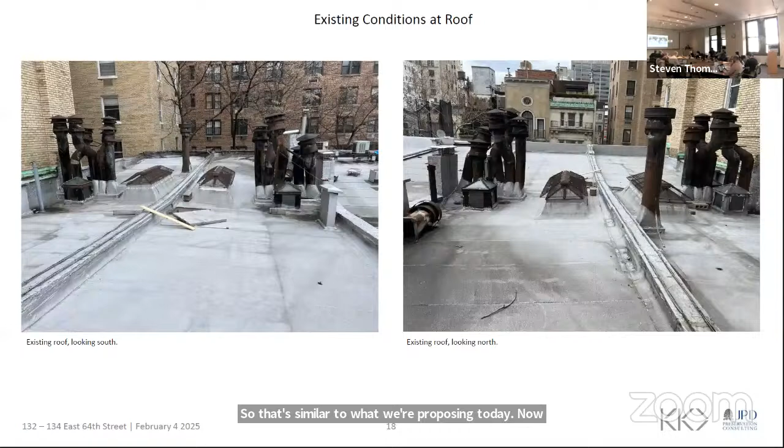Now switching gears, looking at the roof, here's existing conditions looking north and south. The proposal is to construct a rooftop addition set back approximately 14 feet from the front facade and approximately 12.6 feet from the rear facade. The rooftop addition will also feature a stairway bulkhead to the rear that will rise higher than the occupiable space portion of the addition, which you see in these plans.

Oh, and I should mention, let me go back - Bernadette will kill me if I don't mention this - there's a couple of extended flues that have also been mocked up associated with this work.

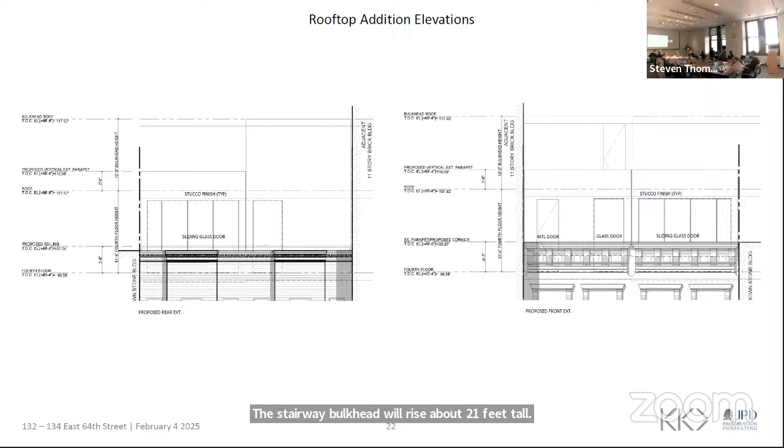Existing and proposed elevations for front and back. Existing building section with a sight line, and proposed sight line. As you can see, the gray areas indicate areas of additional addition to the building, so you're seeing the rooftop addition will not be visible over the front facade through this sight line. There will be some excavation at the cellar, but it will not require underpinning.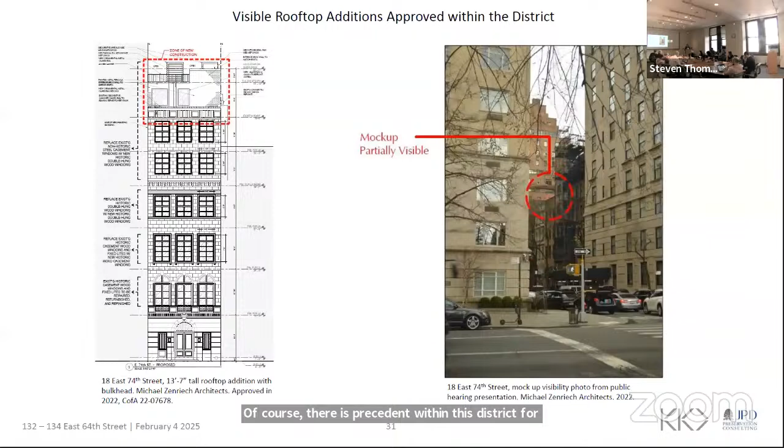Of course, there is precedent within this district for approving other visible rooftop additions. This is 18 East 74th Street, approved in 2022, and this is 163 East 78th Street, approved in 2023.

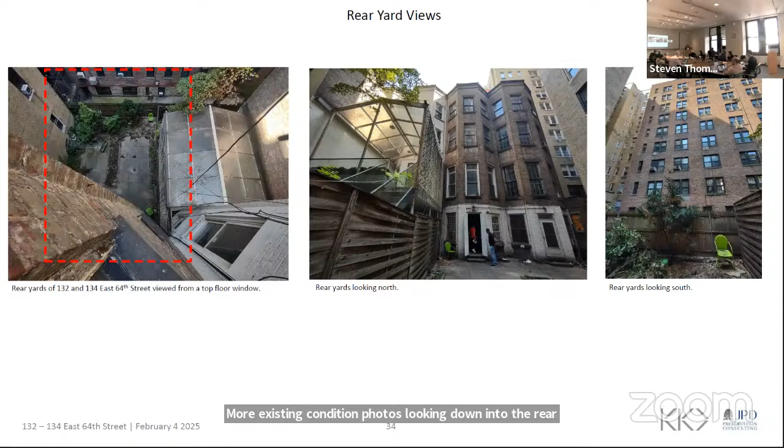Now looking at the rear facade, this is the existing condition. More existing condition photos looking down into the rear yard from the roof and at the apartment building to the south. And just to give you context, this is the entire view looking east, south, west, into the donut.

So the proposal at the rear facade is really just to square off the bottom two floors of the existing chamfered, projecting bays that are interesting on these rear facades - squaring it off at the bottom, just at the center, and installing larger window openings, maintaining a hierarchy of fenestration by not touching any other windows on the facade. Here's that proposed rear in context with its neighbors, and existing and proposed building sections for comparison.

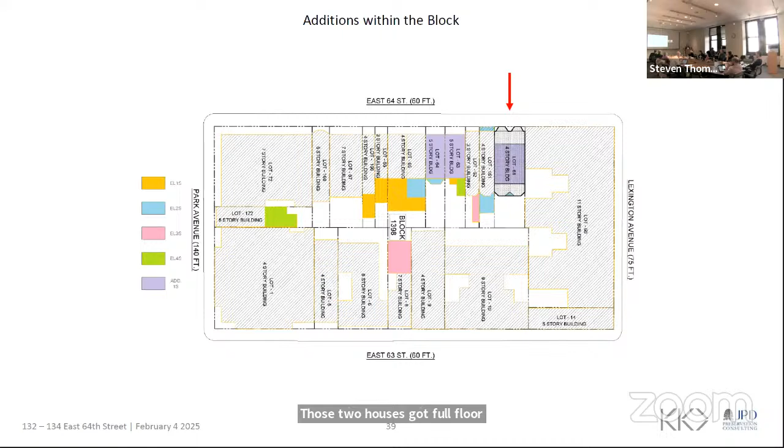Here we're just demonstrating where there are additions within the block presently. You'll note the purple indicates other one-story rooftop additions. The houses just to the west of this row of four houses got full floor additions - the 5th floor on each is actually entirely an addition. And there are other 2-story and even 3-story additions within this block.

Here's an axonometric view to show you what the additions will look like from the rear, at roof and the rear facade.

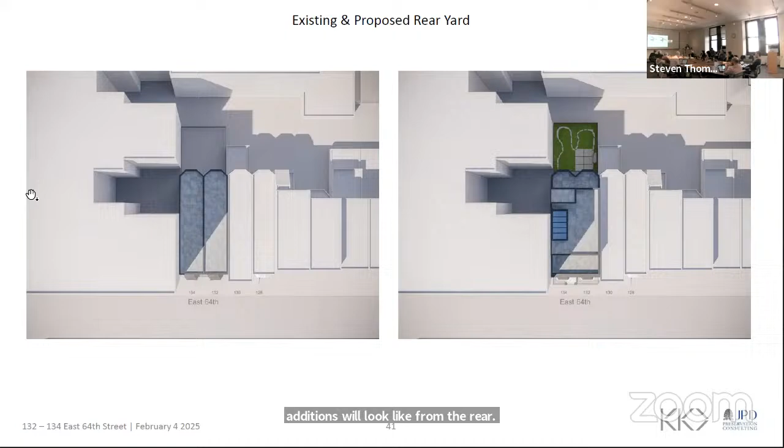An axonometric, or more like a color plan looking down to see what the rear yard will look like.

Materials palette: the finish for the front facade would be limestone colored stucco, same brick to match the existing elsewhere on the house, a wood rear fence, and painting the ironwork black.

These are just sections for the proposed additions, the walls.

Structural sections, details. As I mentioned earlier, part of this proposal is to replace in-kind portions of the party wall, mainly because the party wall between these two houses currently has a 12-inch sag.

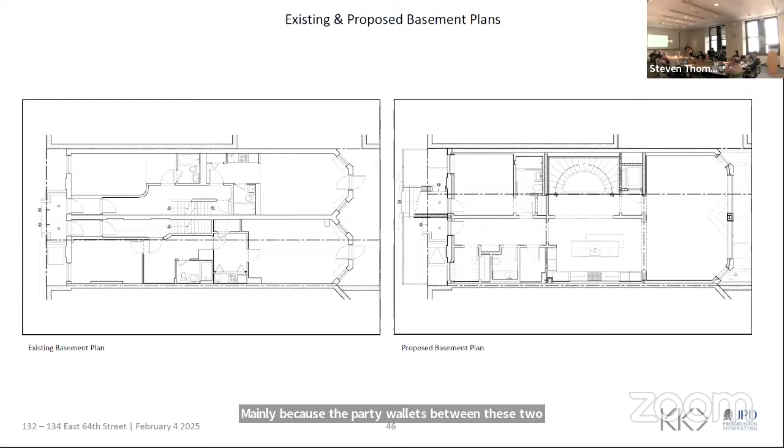So here we're just showing you the existing and proposed plans for each floor, where again we'll also be maintaining a wall toward the front of the house, so that if someone's looking at these houses from the sidewalk, it wouldn't be perceptible that these are becoming one house at the interior.

4th floor. And of course, there is also precedent in this district for unifying two houses at the interior by removing the party wall. This is 15-17 East 77th Street, which was approved in 2023.

And that's it, that's our proposal. We look forward to your questions and comments.

Thank you. Commissioners, questions? Yes, sir, Mr. Jefferson. So on page 11, on the left-hand side...

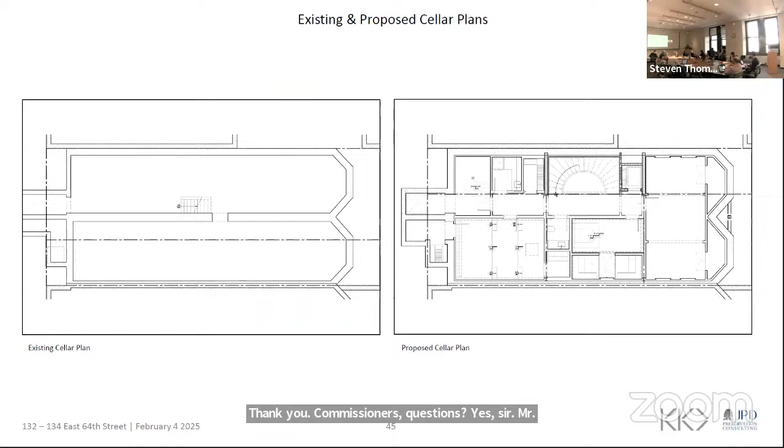The current condition, the capital of that pilaster, that sticks out, right? The capital sticks out, but in the rendering it doesn't seem like it's doing that. Is it been removed or cut back?

I'm sorry, Commissioner, can you tell me which capital do you mean? Are we talking about the center? No, under the bay windows or the cantilever. Oh, I see what you're saying. Right, so that seems to be sticking out as a muscular capital, but I don't see it in the rendering.

Is it cut back? Well, even that's interesting to bring up, because if you look at the photo from the 1940s, that condition's even changed from what the shape of it was in the 1940s.

Jackie, why don't I... come over here before you answer. I'm Andreas, come over here, say your name for the record. Andreas Tomaitis, I'm going to be the architect of record.

The intent is to replicate whatever was there before. The rendering may be a little bit off, but it's structural, it's a concrete pillar, the muscularity is still there. Yes, it's actually a concrete column that supports the pavement.

Okay, but it looks very flat in your rendering. There's no... Yes, you're right that it's supposed to be a little bit more. It will look exactly how it was before. Well, before when, original or now? Original. So you're going to return it to that sort of fan shape.

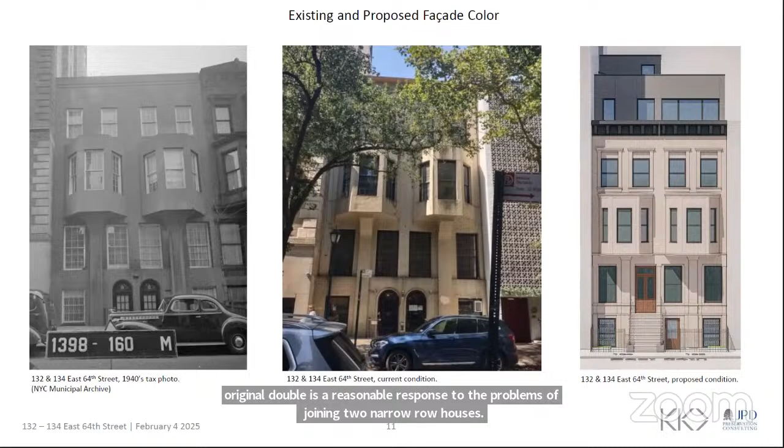The applicant's proposed single stoop instead of the original double is a reasonable response to the problems of joining two narrow row houses. The other changes to the front facade are based on the best sort of historic evidence. It does not appear that the rooftop addition will be visible. Restoring the historic pediments matching the one which was in place in 1940 at 130 would further reduce any possible visibility. And the work on the rear will leave the upper two floors intact.

But if the redesign is to be based on the 1878 original design, the proposed limestone finish is not appropriate. This would not have been found on an 1878 neo-Grec house. The finish should be brownstone.

However, we believe that Boak and Paris's 1934 redesign meets the Commission's standards for a significant alteration. We therefore urge a full discussion of the significance of these existing facades before moving on to considering the proposed extensive alterations.

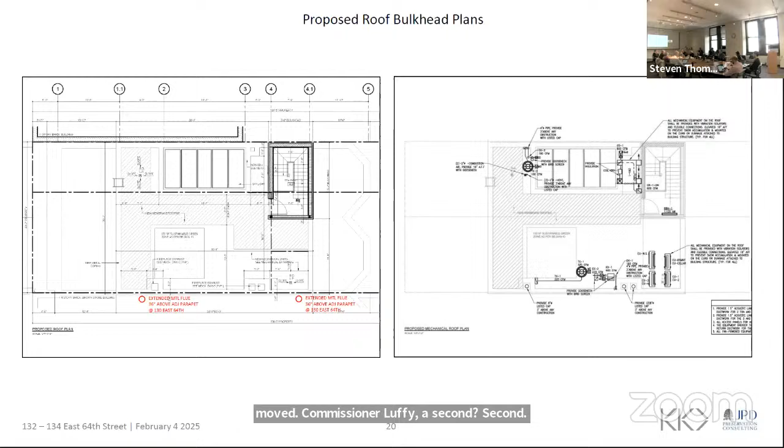Any other questions by the commissioners? Then I think it's time to close the hearing. Commissioner Master, would you offer a motion? So moved. Commissioner Lutfy, a second? Second. All in favor? Aye. Any opposed? So the hearing is now closed and we'll start our discussion.

Sarah always cues this up brilliantly. I'm not going to do that because I won't do it as well as she can.

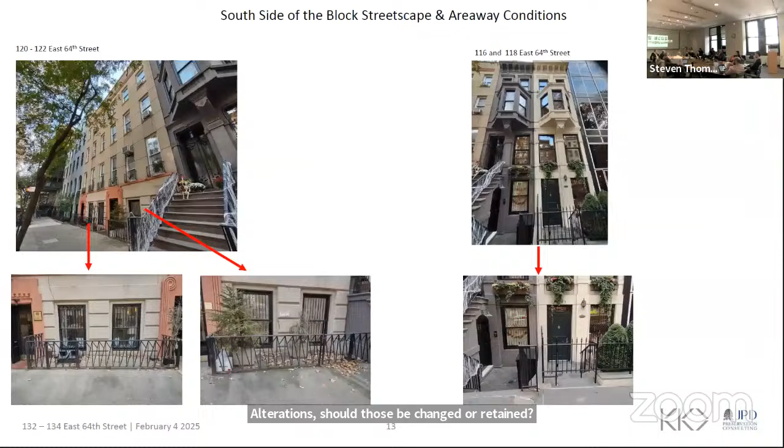But I think one of the most important things for us to come to a decision on is the 1930s alterations—should those be changed or retained? So we want to start with Commissioner Goldblum. Sure. Okay, so that is the crux of the matter here, I think. The determination as to...

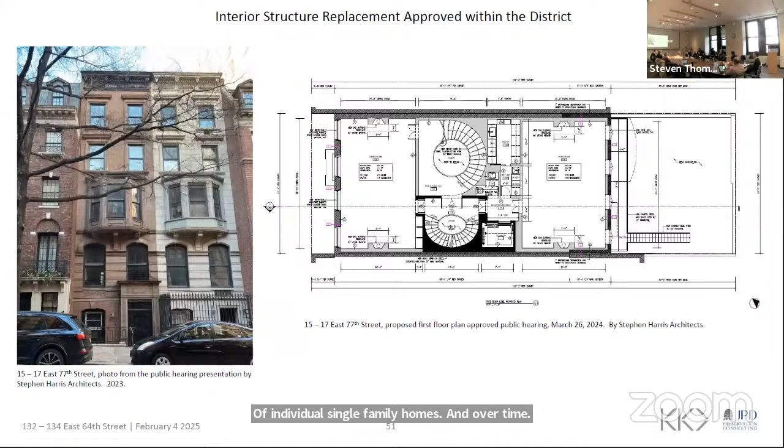It's a very unusual setup, right? This used to be a row of individual single-family homes, and over time, stuff happened, and now it's going to go back to being a single. These two are going to go back to being a single-family home, and we struggle here a lot with the notion of retaining the identity of the original building as an individual house when it's being combined into a mansion. And that's the case here as well. This house is unusual because the original configuration played with the idea of pairing in a very atypical way for brownstone rows, by actually pairing two of them together in the original configuration with the paired stoop, the kind of mirror symmetry. There was a kind of joining and blurring of the line between the two houses intrinsic to the original design.

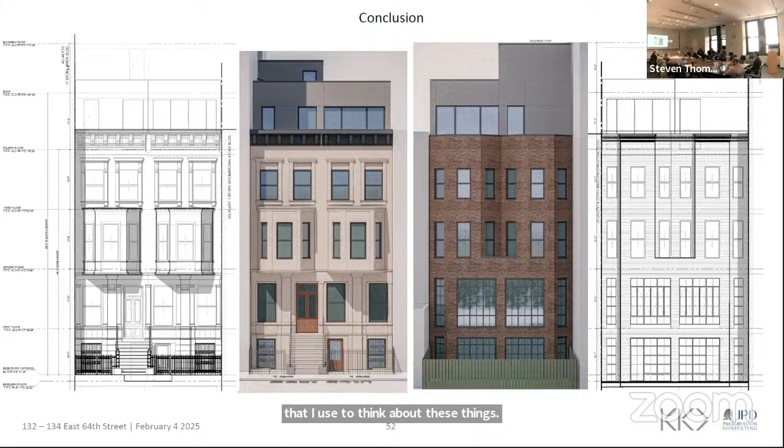For me, I think I agree with Jackie in terms of the interpretation of the aesthetic significance of the 1930s modification, or the stripping of the building and the eradication of the stoops. For me it doesn't, and I'll admit that is an aesthetic judgment. When I see them, I tend to view these things as: was the renovation in the 20th century one that left a positive visual legacy of an aesthetic intent that spoke to the time in which it was done, or was it an erasure or effacing of earlier stuff? I grant that's a subjective, personal definition I use to think about these things. But by that definition, this modification fails to rise to the level of one that merits protecting it.

So I think that the notion of restoring the detail is acceptable to me. That said, I feel that the drawings as we see here and elsewhere do not reflect the level of detail and care that would be necessary to effect that kind of restoration properly.

I think the staff has to look - all you got to do is look at the way the bay window on the building at 128 is actually built versus the way it's drawn here, with pilasters and returns and panels. That very prominent column underneath has a scroll detail, and it's very elaborate. If you're gonna do it, do it, and make it so that it replicates. There's pilasters to the sides of the windows on the main floor. It's a very sophisticated and striking design from that period.

And I think that if you're going to do it, they could do that with staff. I don't think that's an issue. Furthermore, I think the restoration of the detail will actually enhance the stone house, which benefits from contrast. So from all vantage points, using 128 as a model is appropriate.